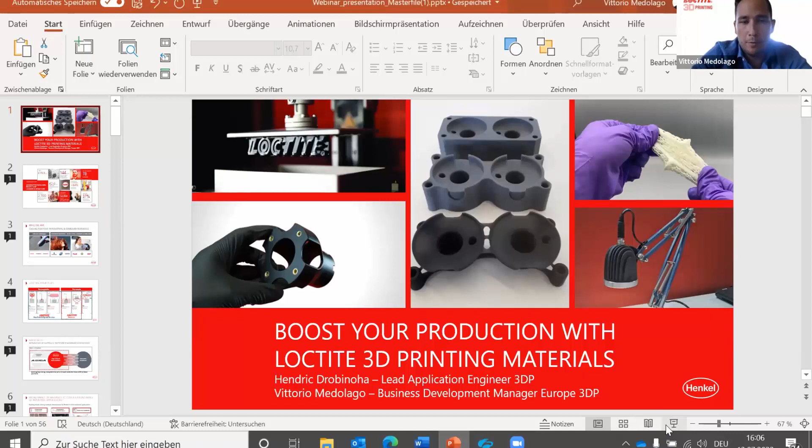Thank you very much. So my name is Vittorio Medolago. I'm responsible business developer for Europe, for the DLP solution, let's say for the Loctite brand here in Europe. Just to give you a short guidance on what we are doing and from where we are coming, we belong to the Henkel Group, which is one of the 40 DAX companies in Germany, doing 20 billion revenue a year and has around 53,000 employees. It's important to know because here we have a strong support and backup from a company and a very professional organization within the B2B, which helps us a lot in the daily business. So we are coming basically from an acquisition in 2017 in Concord in the Bay Area, very close to San Francisco, a company called Molecule.

And today we are somehow like a small startup within a very huge organization. So we try really to get the best out of both, being very flexible on a startup level, but on the other side also taking care and profiting from the support of the global organization, which Henkel is offering to us. Henkel might not be immediately a very famous brand, maybe to the people in America.

But behind Henkel, we have, of course, a lot of brands which are very famous in the beauty care and laundry home care, very well known, like, for example, Schwarzkopf, Dial, Syoss, Persil, Bref. So all the products where you're using the daily business.

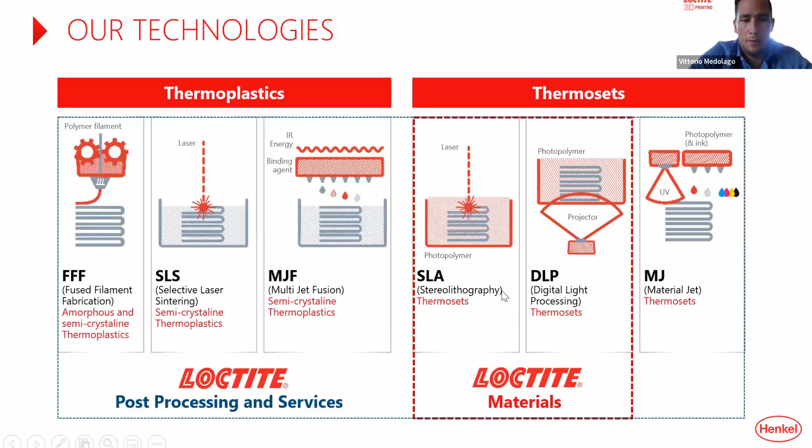So today, as we are working very closely with our ecosystem partner Asiga, we would like to give you an indication of how we see the world of 3D printing and generally the hardware technology. Our perspective is that it's getting very complex. It's a complex technology on the resin side, and it's getting very complex on the hardware side.

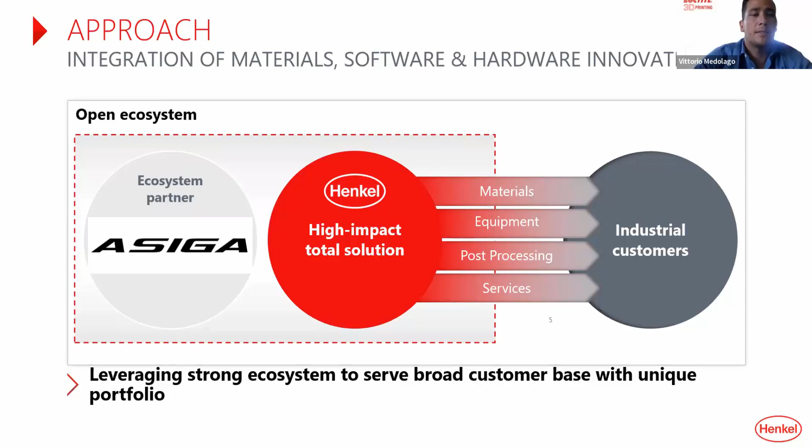We believe that the best way to offer a solution to a final end customer, on the right side you see the industrial end customers, is really to offer it by leveraging the core competencies of companies. Our core competency is to be a chemical company, to have expertise in chemistry. And the expertise of Asiga is to be a very great hardware company in the field of DLP. This is really leveraging both core competencies, and together offering a final solution to the end customer. This is why, let's say, the synergy which we build by really leveraging the core competencies.

All right, yeah, so I will take it over. Thanks, Vittorio. So let's jump into a little bit more detail, into our materials. So first of all, what we usually do, we cluster our materials into three big sections.

We have our photoplastics. Within this section, we mostly have our rigid materials with special properties like high temperature resistance or impact resistance. Then we have our photoelastic materials with, like, low Shore A, high Shore A, high elongation, good rebound performance, and so on. And then the third section is resins for healthcare, so biocompatible resins.

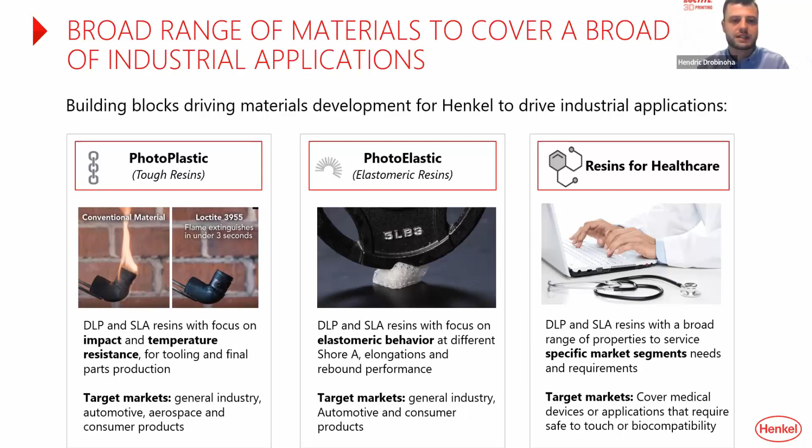Jumping over to the next slide, you see our broad portfolio. Don't be scared, I don't really go into detail of all of these resins because I don't want to bore you with all of these properties, but this slide is really for giving you an overview of how diverse our portfolio currently is.

So on the left side, our high impact resistance materials. Within this section, we really have materials which are more like, for example, polypropylene-like or ABS-like, so with good elongation, high toughness, good impact resistance.

On the left corner on the bottom, we have the high temperature resistance material. So here we have materials of really high HDT, with high strength, and also like the 3955 certified through different sections — for example, the UL V0 certification, so flame retardancy and flame retardant.

Then in the middle, the elastomerics. Here we have four resins currently. On the right side, our 402 and the 475. The 402 has a higher tear strength but also a higher Shore A. And the 475 is a little bit lower in tear strength, but also softer.

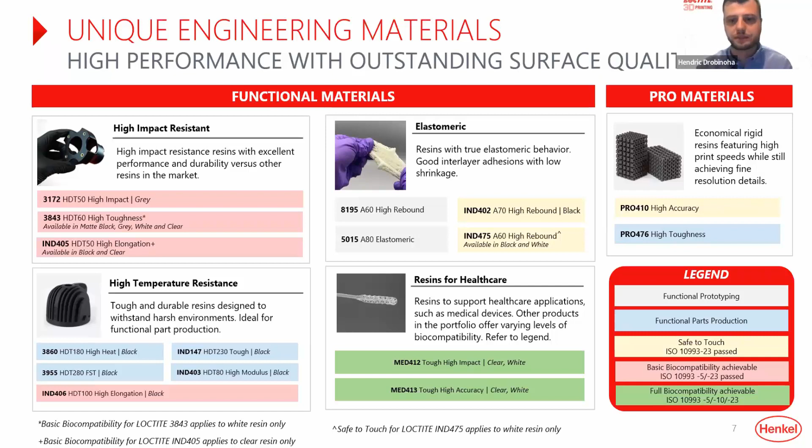So what is very important, what we figured out - this is not really a secrecy - is that you have to control your process. If you want to have a constant result, if you want to get an application with big customers, big OEMs, you need to be repetitive in results.

And for that, we created our workflow validation. So first of all, what is the workflow, or what is included in the workflow? There is the material for sure, there is a printer, there is a cleaning device, and there is a curing device. But all of these several instances have a lot of data behind them.

For the materials, you have the product code, you have batch numbers, you have the version, you have the best before date. For the printer, you have your build styles, and behind those build styles are a lot of parameters - a lot of operating conditions.

The same for your cleaning device - which model do you use and how old is the model, what cleaning fluid, is it IPA, is it a TPM based cleaner, and also the duration, or if you can also heat it up, for example not in case of IPA, but for TPM based cleaners.

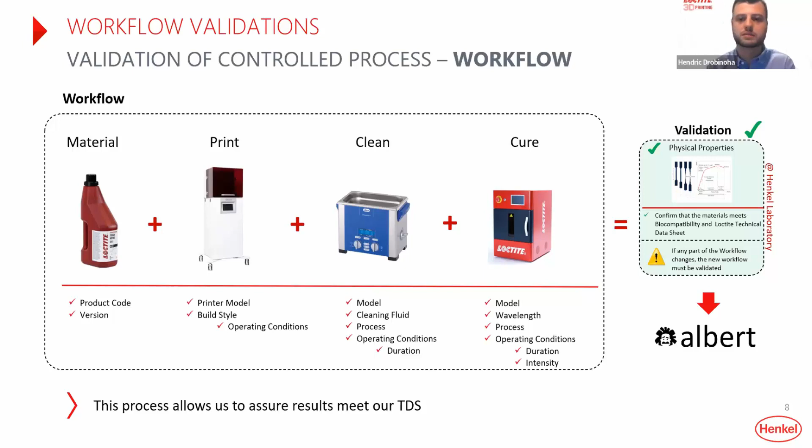Jumping over to the next slide, I just want to give an additional feature for the medical section, because the medical section, when it comes to validation, is a little bit different - on top of the standard validation like testing physical and thermal properties, we are also testing

biocompatibility and extraction, meaning we're doing cytotoxicity testing externally with partner labs which are accredited. We do sensitization and irritation testing like the 10993, 10 or 23. And this is just what I really wanted to highlight.

And on the right side, we also have listed resins - not only the fully biocompatible resins, but also resins to support healthcare applications, what we call 'safe to touch'. There we did basic biocompatible testing, meaning we tested cytotoxicity and irritation.

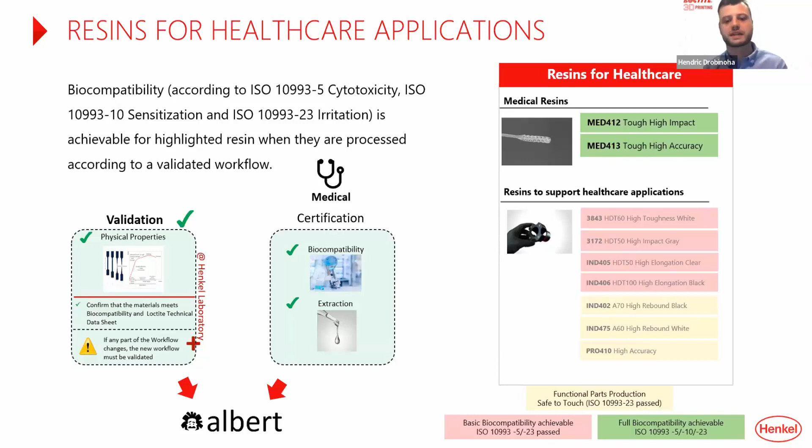So now we've created a lot of data, we got a lot of reports and a lot of values, and these are, as said, floating somewhere. So we have to summarize them, we have to make them clean, and for that we're using a software called Albert.

Albert is a data bank. So far so good, but it's a data bank with artificial intelligence and with a lot of tools included. Albert was actually invented within Loctite 3D printing, and it's so successful that it's now spreading over the Henkel

over the complete Henkel development side - within adhesives, within laundry and beauty. So everyone is now using Albert, and there are several reasons why. So what can you do with Albert?

You can track your whole inventory, because as said, you have the printer, the post-curing unit, and so on, and you can create a digital duplicate. So we're putting all these things as a digital duplicate into Albert. We're creating our whole inventory, including everything.

Then we are tracking all this data, like the whole workflow, with all the data going into Albert, and that makes it possible to

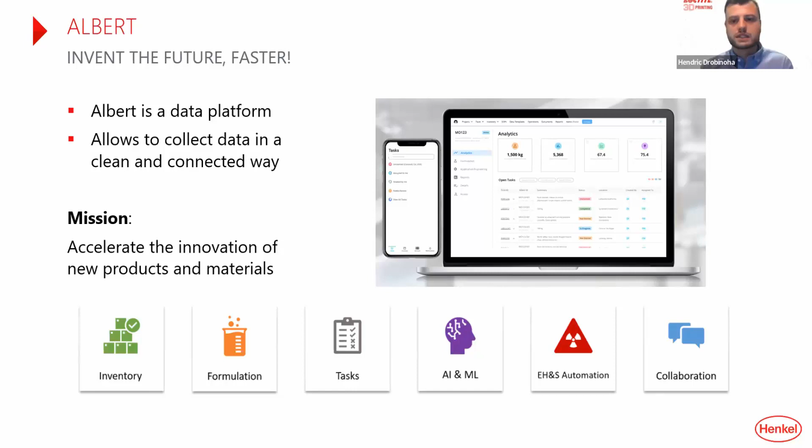Next slide, please. Thank you very much, Hendric, for giving us this insight about Albert. We are already currently in a phase of commercializing Albert as a software.

Maybe this might be interesting for our competitors. We want to give you an indication about the application currently, because we see a strong growth path for DLP, especially the last 4 quarters were very intense. I would also see this slide as not up to date, but I want to give some indication in this webinar for the Asiga users about what could be interesting.

First of all, also because I have worked 7 years for other 3D printing technologies like SLS, I want to give an idea about which kind of market segment this technology can achieve.

So the nice thing is the speed of DLP, and of course the quality surface and accuracy. For that, I would say in every market where you have a visible part, whether it's interior or exterior parts, where people see the visible part, let's say in a car, a motorcycle or whatever, I would say this is a strong hint that DLP is the right choice for that kind of application.

Another thing is, for example, connectors - a huge business currently for DLP, and we see a lot of potential because you have very thin wall thicknesses. You need a good surface finish, and for some of our materials, we have quality assurance certification, for example UL94, and this helps a lot to enter those segments.

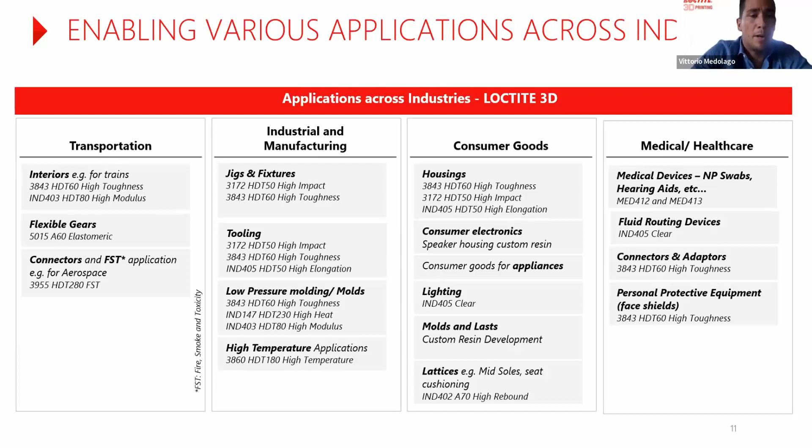Another slide, which I just want to give you, it's a very quick and dirty overview about the industries. Also to give an idea that we are really far off from just being a prototype, just being a maybe not-reliable resin - that really changed in the last year. So really all you can see here, it's something which was created in I would say roughly one year or maybe a bit more. But we are really entering B2B segments.

We have for some of our resins the flame, smoke and toxicity standard achieved from Airbus. We also have the toxic gas pass from Boeing. We have the UL 94 achieved V0, which is the most challenging for the UL certification. We have passed it with 3 millimeters.

We have some material fitting for the European railways, where we have passed different types of the EN 45545 norm. And for the automotive, we see a big traction really here. If you have a customer in the automotive space, please reach out to us, reach Asiga. We see there a lot of material fitting into the portfolio. I will also share shortly a case study which we created around that.

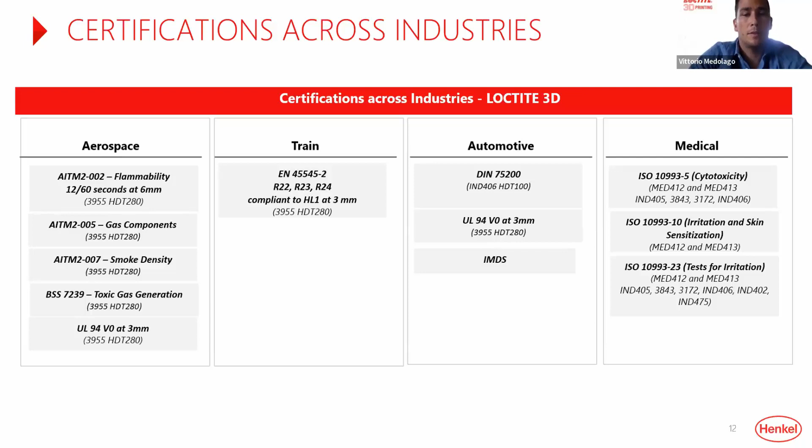And also we have first materials being IMDS registered, which is very important - if you are going to supply serial application parts to automotive, it will be registered into IMDS. And also here we have started with a lot of nice first serial application projects. And the other thing is the medical field, of course, as already Hendric told you, there are different fully biocompatible materials which we can offer. Hendric, it's your turn.

Yeah, so just real quick, to give you guys an overview - we talked about validation, and this is an overview about what already has been validated on the Asiga machines, what is currently in process. So the yellow dots are the in-process logos, and the green dots are the ones which are already validated. So you see that a lot of very popular resins are already validated.

And I'm always really impressed by the Asigas because, compared to other printers, they're cheap, but that doesn't mean that your quality or your parts that come out of Asiga printers are cheap or lesser in quality. They're really great. I really love to print with the Asigas, and it's just to highlight that you guys can really start with printing these materials.

And as you may see, the 3955 - because this is kind of a hidden secrecy, it's not very well known - that we validated the 3955 on the Asiga. The Asiga managed to have a homogeneous 60 degrees C, making the material able to print and look as it should be. And this is very good. This is very impressive.

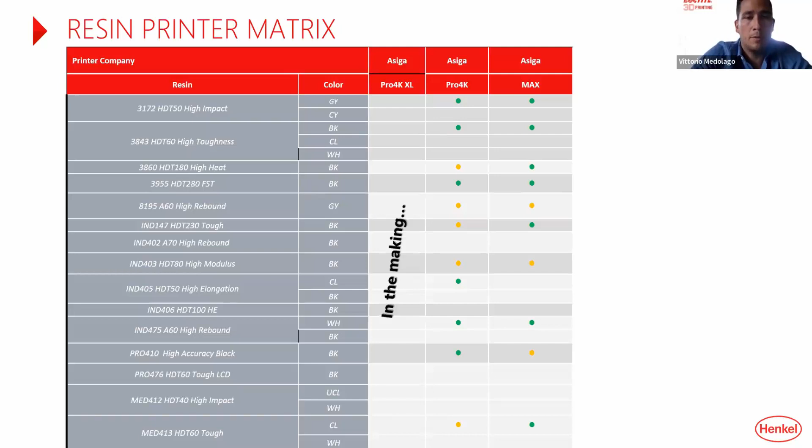Thanks to Albert, the software, and the workflow validation process which Hendric also mentioned - this is just a short instant picture. Whenever you as an Asiga user or potential reseller are interested in one of these materials, we can go through this workflow validation process together with Asiga and Hendric. Together with our software Albert, we can really quickly implement new processes. So please reach out to us whenever you have material which might not be already qualified yet.

Validation is good, controlling everything is better, but what is really missing? These questions are coming over and over again from big OEMs, because they need certification, they need clarity on how material behaves over time.

So what about durability? This is really our focus from our technical department - to create data on durability, because we know these materials are UV sensitive, UV reactive. There will be something that happens over time with UV exposure. Also heat is a thing, because it accelerates the aging process. What about chemical resistance? These questions keep coming up over and over again.

This is why our task for this year, and for the next years, is that the more materials we have, the more data we will create. Just as an example, our 3843 is our most sold product, and we already created this data.

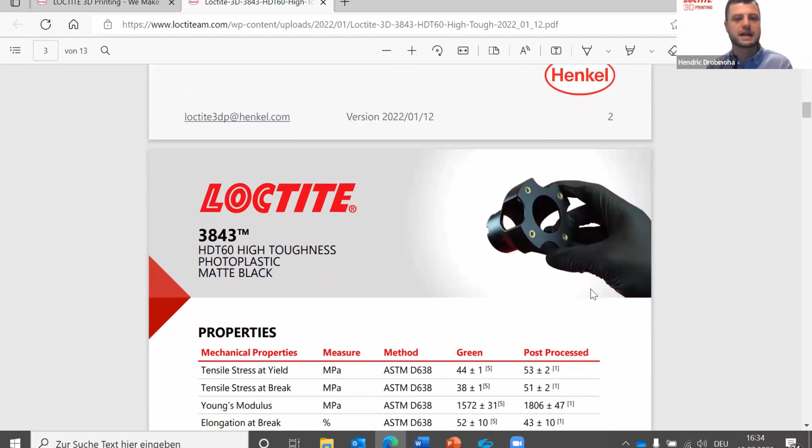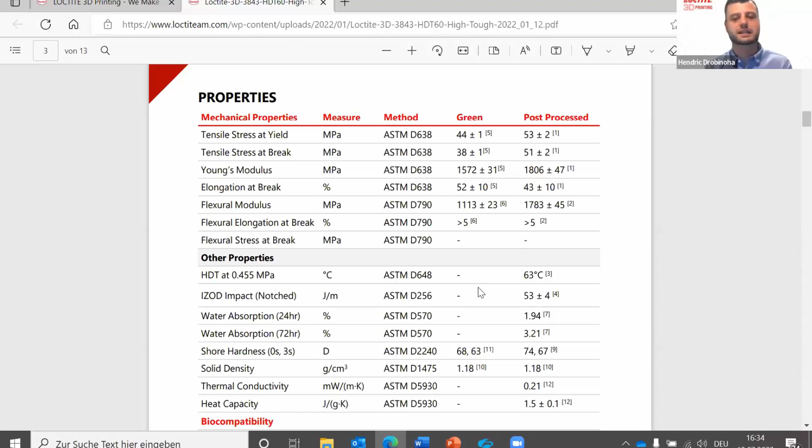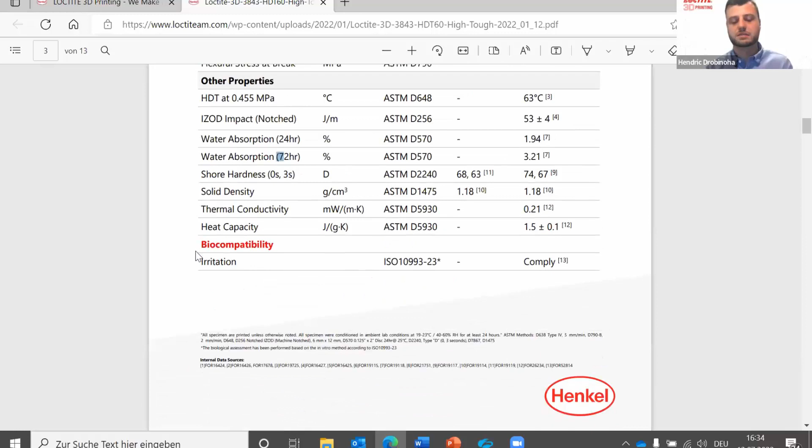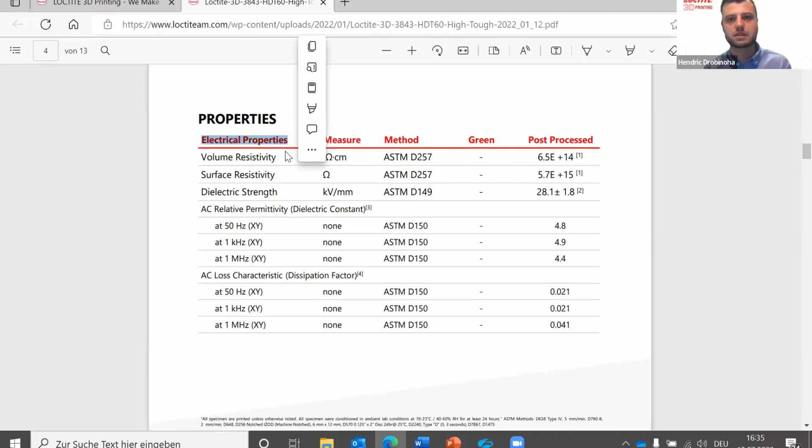Please start with the top - I want to take this as an example, this is also our TDS. We don't just want a 2-page paper with static values highlighted. Sure, we're still doing this, still highlighting our mechanical and thermal properties with static values. But we decided to extend these technical data sheets to include all the durability data. We know OEMs or big customers will still test it on their own, but it gives them a really good indication about the material and a feeling for which material could fit their applications.

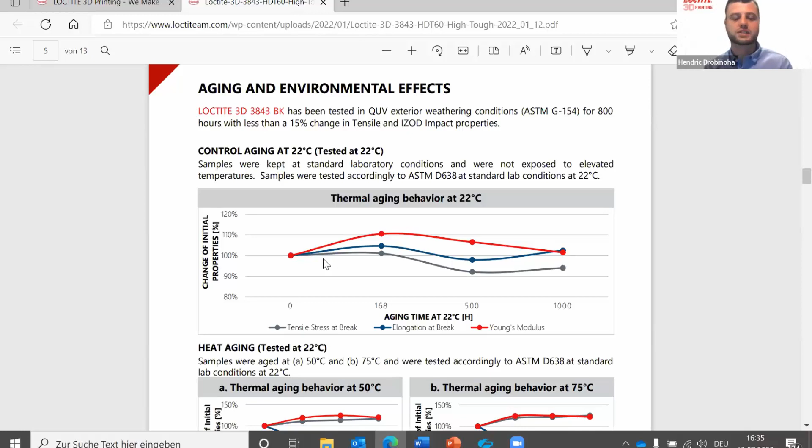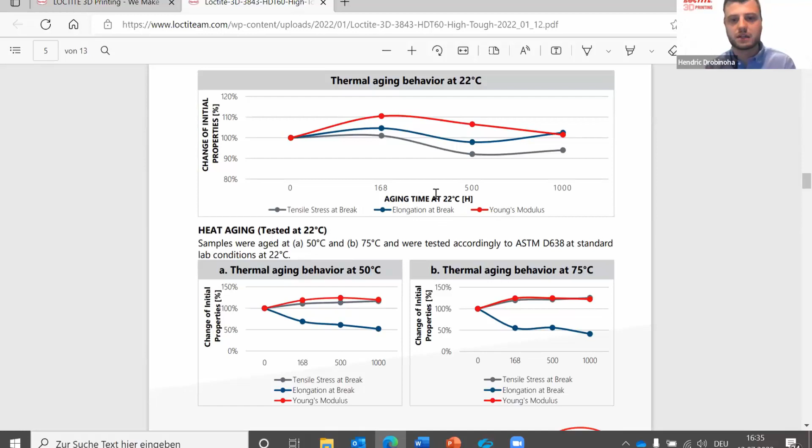Now scroll down a bit. So sure, we have all the static behaviors here, and now we're coming to these pages, which we created in terms of durability. We inserted diagrams showing how the material behaves - for example here, thermal aging at 22°C, how it behaves after 1,000 hours, at 50°C, at 75°C. Because this is what a customer really wants to know.

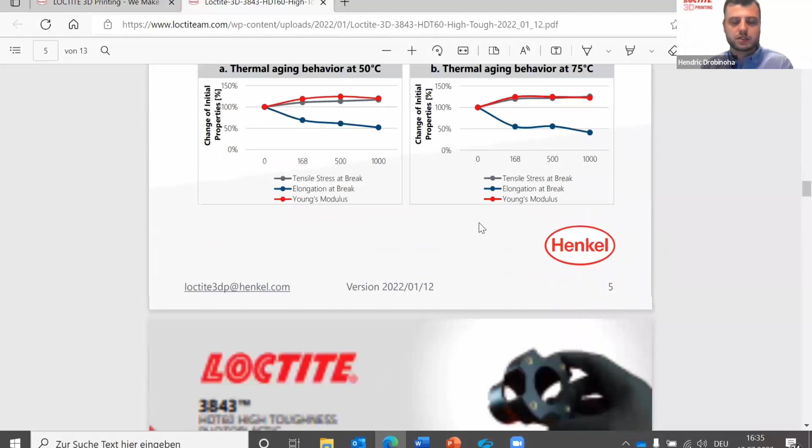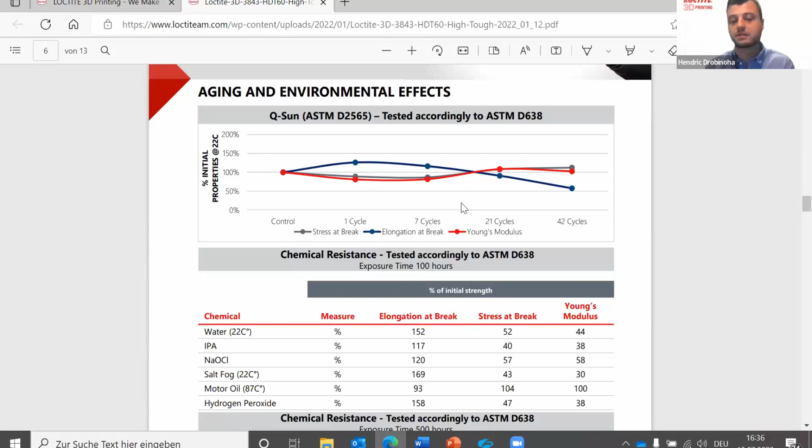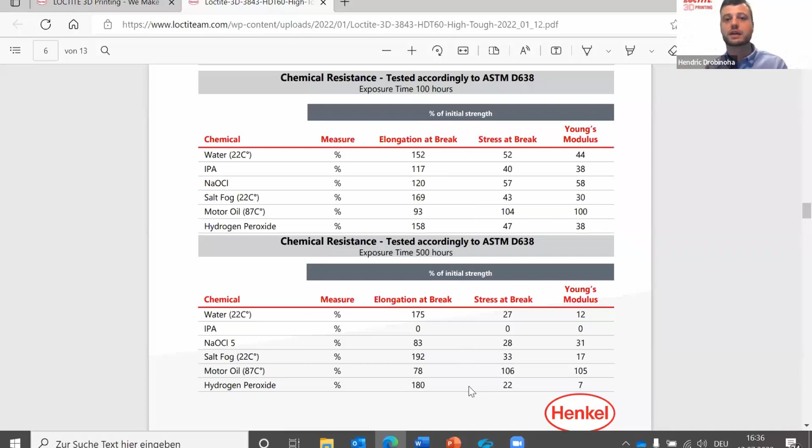Scroll down a bit - next one is Q-Sun and UV exposure, also here exposed up to 100 hours. How are the mechanical properties looking after those 100 hours, after 500 or 1,000 hours? All this data we are creating at our sites in Concord, in Heidelberg, and so on, with different equipment. We invested a lot of money in testing equipment, and we want to really highlight that on our technical data sheets to help you find the perfect material for your applications.

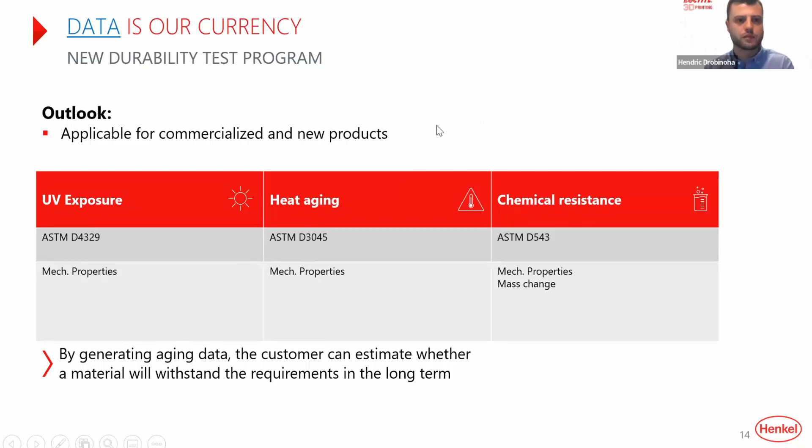Now I want to give a short introduction to our newest member of the Loctite material family, because it's special and unique - the 3D IND 380. It was just announced a couple weeks ago. It's an ESD-safe material with great static dissipative properties, for fixtures and tooling at high temperature, like molding, low pressure, but especially for electronic device manufacturing processes, established at several customer sites. It's a high modulus material, meaning very stiff, with really good HDT, high accuracy, fine detailed printing, and a really good surface finish.

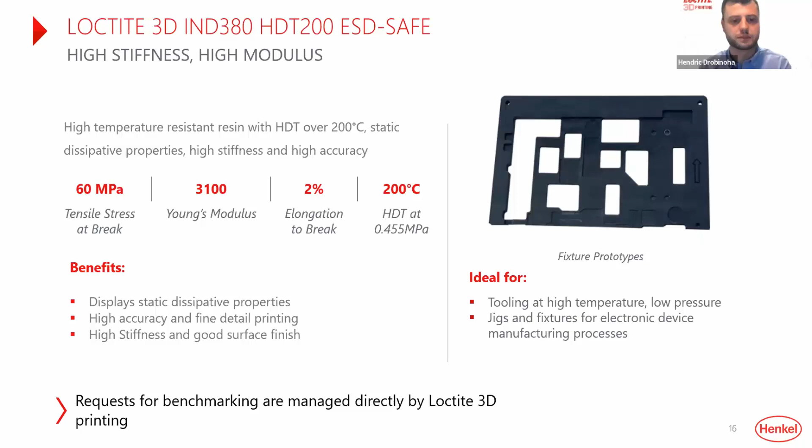Just as a kind of teaser - this is one of the newest materials. We're currently in the pre-launch phase, going out in the next couple of months. You'll hear more about that.

I'd like to give you two case studies, just to give an idea of what has been achieved, especially in the last few months. It was also possible for us to publish some of our cases, since we currently have a lot of projects ongoing. Unfortunately most of those cannot be shared, but we have two main companies which allowed us to share their case. We were really proud, and this gives you guidance as an Asiga user or potential Asiga user on what can be done with an Asiga machine, for example using one of our materials.

The first thing, which we also announced a couple of weeks ago on LinkedIn, maybe you followed it already, but I really don't get bored sharing it because it's just a 1 month old case study: a real serial application with KTM, which we created on a 3843 material that perfectly functions also on Asiga machines.

This was one of my first projects when I switched to Henkel around 1 year ago. We really tried to find serial application parts and challenge our material to see if it passes the required tests - for example UV, temperature, accelerated weathering test, and chemical resistance against motor oil and against salt in the winter when it's snowing.

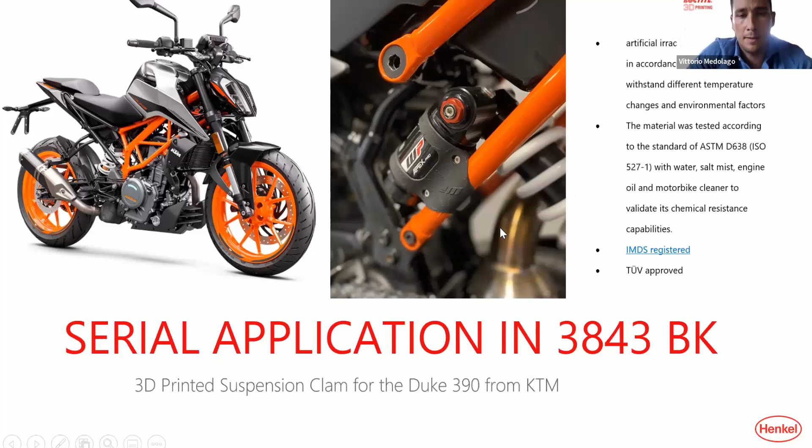The other thing which is very nice, also just a couple of weeks ago, so both cases very fresh, is the tooling which we mentioned before. For example, the IND 147 has an HDT of 290 degrees, which perfectly fits a lot of applications that can be used as a tool insert. Also here, Pepsi created - it was patented already in 2020, so we could not talk about it before - a hybrid tooling solution where they use metal for the outer part, and for the inner part they use our IND 147 tooling material today.

So also here, when I showed you the general overview before, keep in mind we have some very strong tooling material. You might have also heard about the Ecco case, where you're doing shoe molds, last molds. We also have experience with LSR, silicone injections. So really you can reach out to us, and together with our technical team like Hendrik and worldwide, we can support specific needs.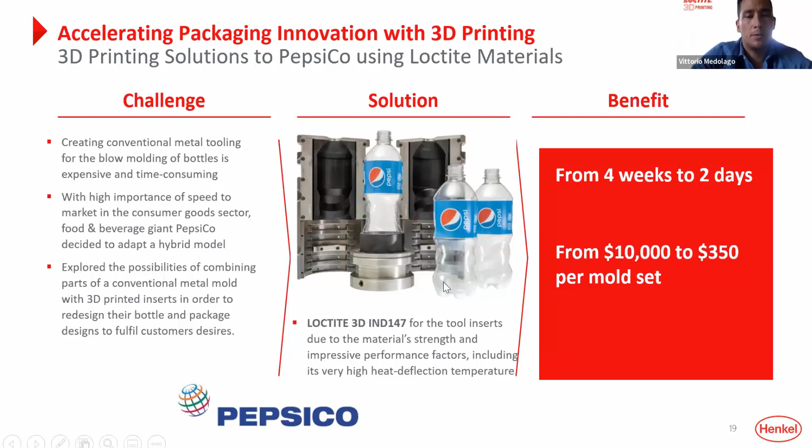Why I'm saying this is because we also learned that tooling, because of the pressure, the temperature, and also the material you're using for injection, might need a custom solution to be created. Albert also allows us, the software, to be very quick in developing new materials. So for tooling too, if you have a nice new application, you can reach out to us and we can find a solution for you.

Last but not least, I also want to give you an overview of our website, because you can really find everything there. I'm using this as a sales and business developer daily, because it's really intended to have all information collected on one website.

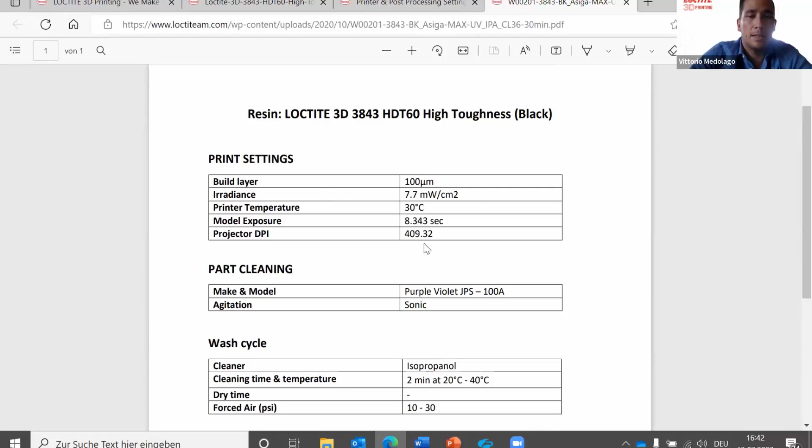For example, we have the printer and post-processing setup where you can select your Asiga machine with a validated workflow which we created along with them, and you will find the properties you need and can create on your machine, like the build styles which need to be entered to make this successful on your machine. This is actually the workflow validation process. The result is not only the file itself, the INI file for the Asiga machine, but also the printer setting and how we achieve the properties shown on our data sheet.

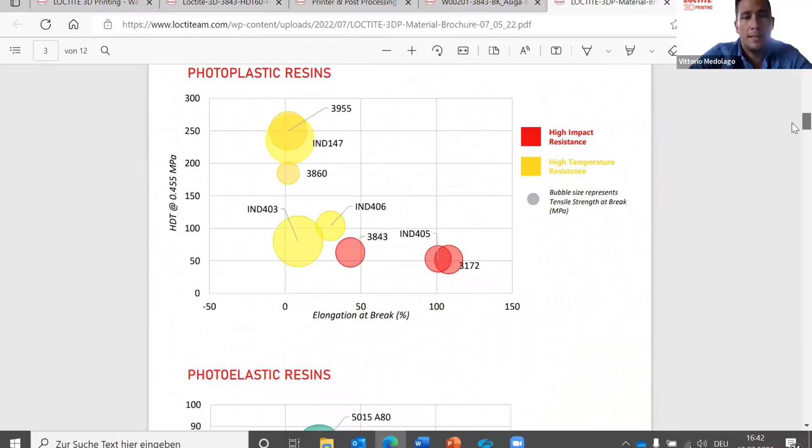The other thing which is very interesting is of course our general material brochure, also visible on our website. Why am I showing this? Because it gives everything at a glance, a very good overview. On the X-Y axis, for example, typically in B2B you talk about temperature, and typically also about elongation at break. We created some nice overviews where you immediately get a good overview of which material achieves which kind of properties on those two axes.

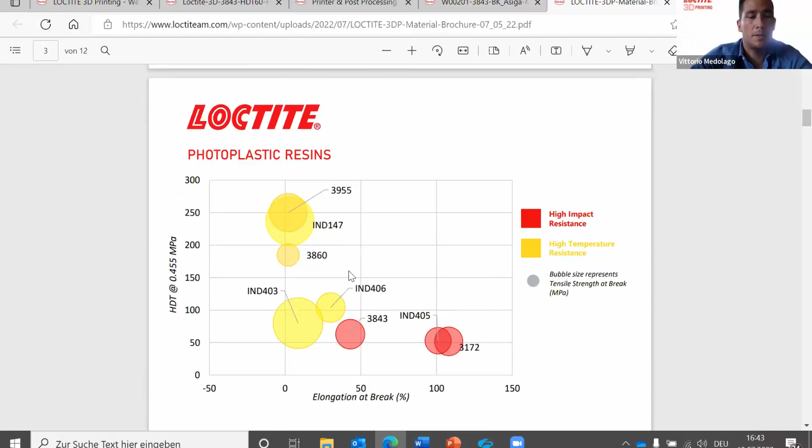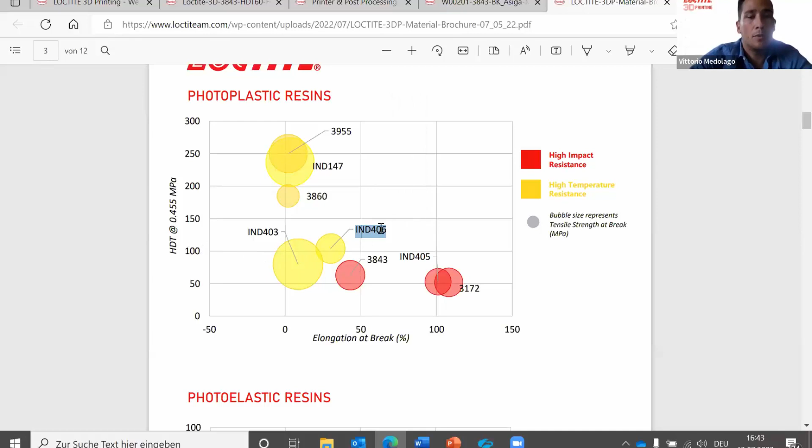Is it a more high temperature material? Is it more a high elongation material? Or do you need something with a balance, which could be, for example, the IND406 - a material that automotive companies like very much because it has an HDT of over 100 degrees, but still elongation of 25-30%.

The other thing is our elastomer materials. As you might know, if you're working B2B, typically the question is which kind of shore hardness does the material have? We have like 60 to 80, 90. This is our portfolio.

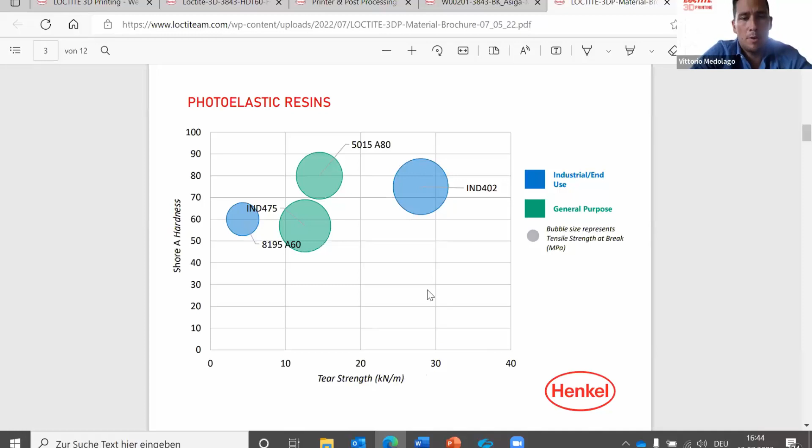We have from prototyping material to more functional serial application material, because we have a material which has a higher tear strength, so we try to measure it with tear strength, but also stay very open if you have other projects to measure in other ways. I wanted to give you this guidance, because those two pictures plus also page 4 give you a full overview about the materials and properties in one pager, and it's very easy to look into.

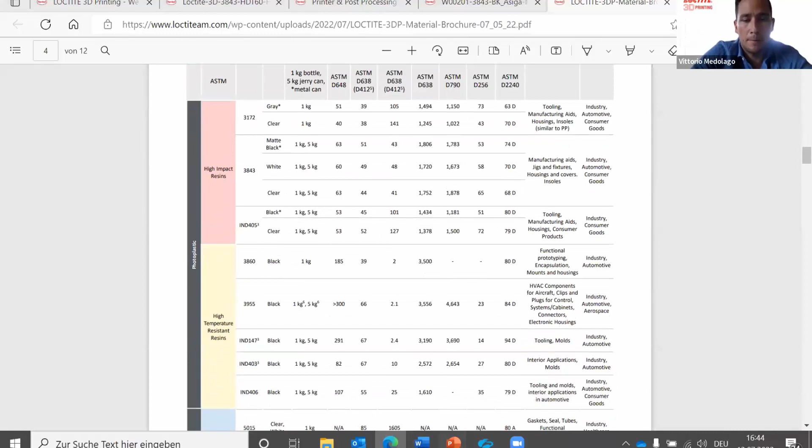Last but not least, I showed you the case study, but we have more of that. Feel free to go on our website, Loctite AM for additive manufacturing dot com. You will find other stories. We're talking about case studies, but these are really serial applications. Pepsi is using this for tooling, KTM is printing this for serial application, and you can also find other things like connectors and circuit boards.

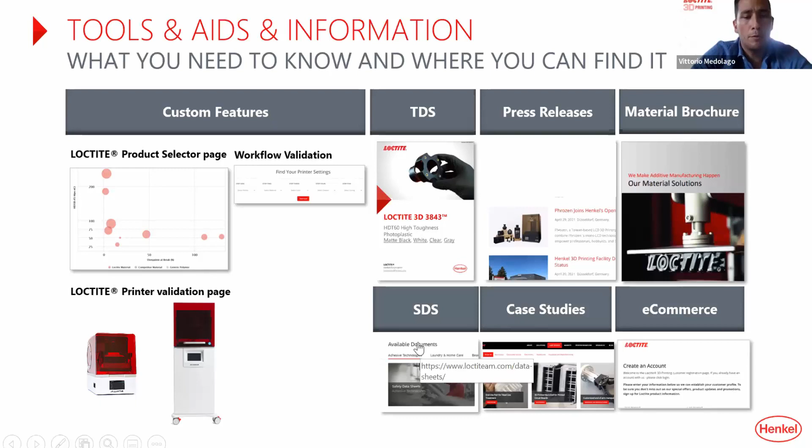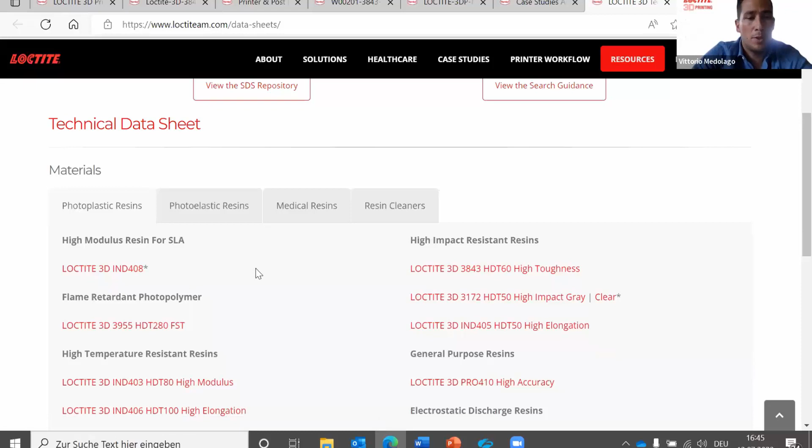To finalize the point, if you want a quick overview about the data sheet or safety data sheet, which often comes up, of course you can reach us out. But the other thing is we've created a site called Data Sheets, where you have all the data sheets with all the data which Hendrik showed, which is electrical properties, mechanical properties, how it behaves with water, how it behaves with chemicals, how it behaves long term, how it behaves with UV. We really try to collect all the information for all the data sheets. Plus you'll also find a link to the safety data sheet overview.

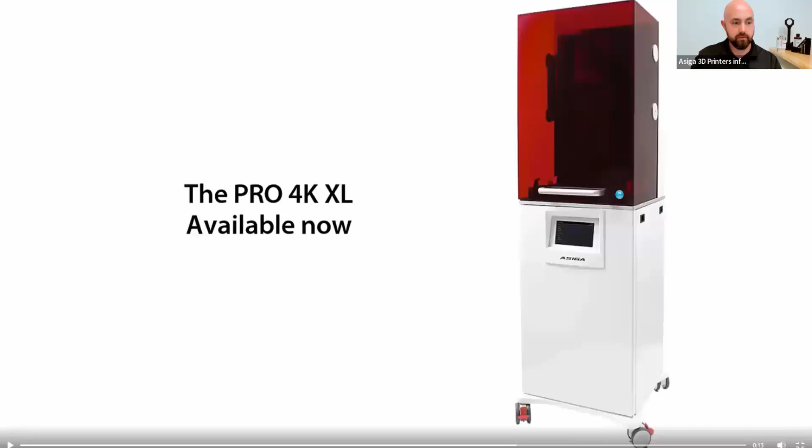We cannot see the video. Sorry about that, you couldn't see the video. Let me share that again. It should be able to work. How about now, can you see the video? All right, sorry about that. At least you got to hear the catchy video, or the sound or music, hopefully. The sound was good. All right, here we go.

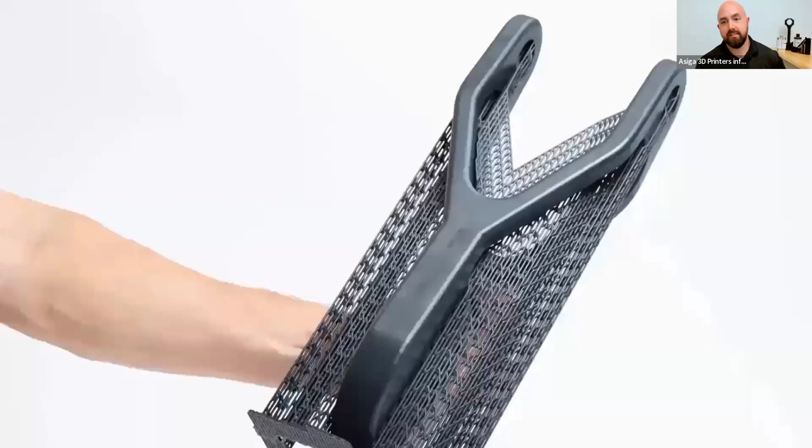So just a quick note, can you guys see the slide again now after the video? Perfect. I always find it funny when we have technological companies such as Henkel or Asiga, and we run these presentations and then we stumble upon the simplest technical difficulties with an application called Zoom that we use so often. Sorry about the little glitch there.

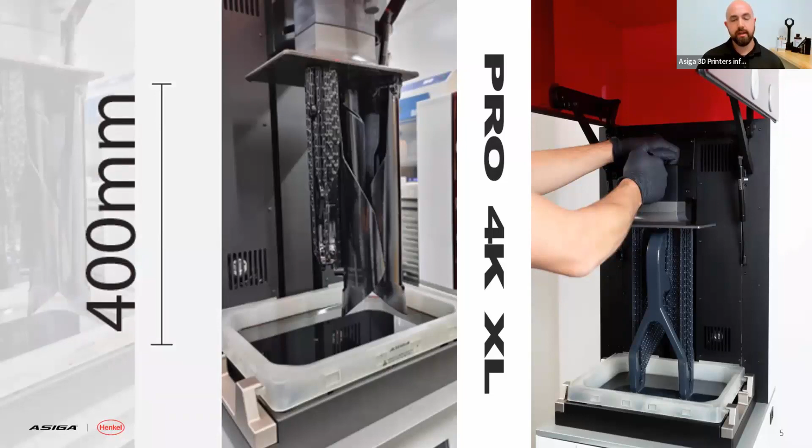So that's our Asiga Pro 4KXL. It's a very exciting machine for us because we wanted something that can print larger parts. Our new machine, the 4KXL, has the exact same build envelope size as the 4K offerings we have, but it has a 400 millimeter Z-axis.

If you were at Rapid TCT, you were able to see some of the parts that were printed on the dirt bike that we had on display - for example, the fork covers. And you can also see there's a swing arm on the right-hand side, just showing a large-scale production part.

If we look at the technical features of the 4KXL, it has the exact same advancements that our other equipment has. It has the SPS smart positioning system technology. You can get it in a 405 nanometer or 385 nanometer UV light technology. It has that same excellent pixel placement, very small pixels, and high speed printing up to 60 millimeters per hour.

And of course, it comes with that very economical cost from Asiga at $29,990. Buying a printer at this scale, this size, we are going to be the most affordable option and probably one of the best printers available for that.

I do have a print that actually came off that we had on display, just so you guys can see the sheer size. I mean, this thing is massive. This was printed on that 4KXL, and I believe this was the 3843 material, Vittorio, that we were discussing earlier. It's just really resilient, very strong, and you can see the sheer mass that we can actually print on the Pro 4KXL today.

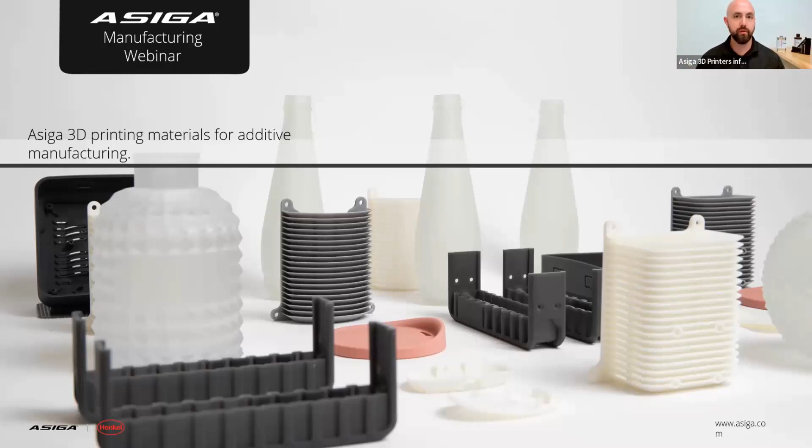That's where partnerships such as Henkel Loctite and Asiga grow so well together because they have materials for those open platform systems such as Asiga. Plus, if there's anything outside of Henkel that you need to find, we have over 500 validated profiles available.

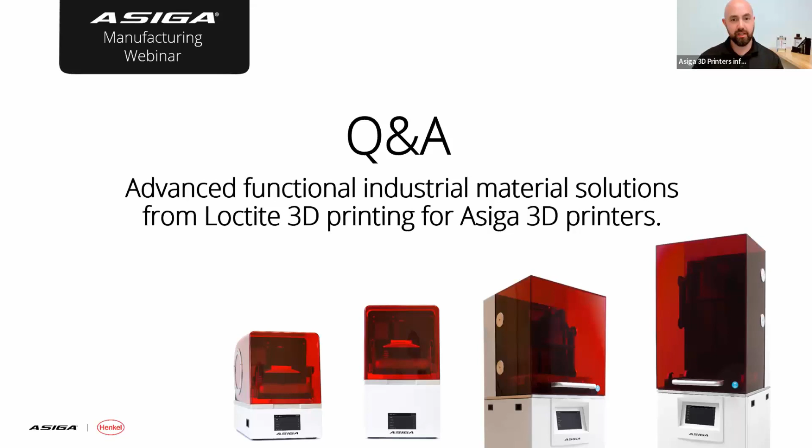We had quite a few questions come up, guys. I'm just going to go ahead and exit out of the presentation. So the first question I think we had come in was actually for Henkel, and it says: is Henkel already working on a TPO-free shell material due to the fact that there will be a shift of TPO materials in reprotoxic class?

Yes, I can answer on this. We know that fact - that's a good point, and yeah, we are working to reformulate without TPO all of our current healthcare materials, and all of our new materials coming up to market are already TPO free. We know that it is on the focus of REACH, we know those are called reprotoxic class, and yeah, all of them will be available TPO free in the future. Good, awesome.

We had another one come in regarding the TPO, so that's answered there. And then this is also for Henkel: the UL94 V-0 certification right now only applies to the 3955 and the Industrial 404 when printed on the Stratasys Origin 1 printer. Is the intention to add the Asiga printer to this recognition in the future?